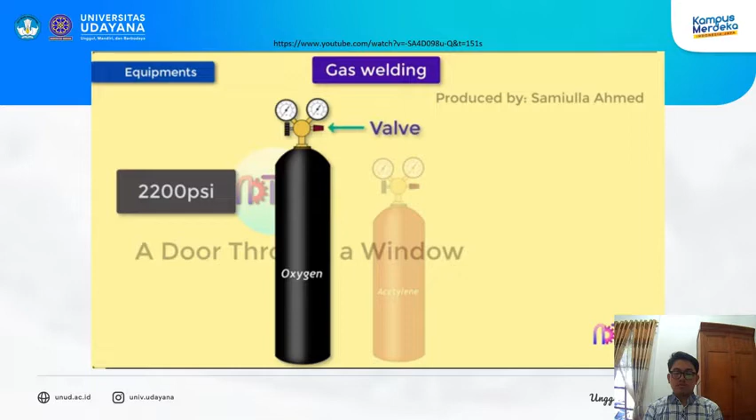Oxygen cylinders contain compressed oxygen at high pressure that can be as high as 2200 psi. All cylinders have valves and are fitted with a screw-on steel cap that protects the cylinder valve when the cylinder is not in use. Acetylene cylinders contain acetylene under pressure, made of steel, and have cylinder valves. The cylinders contain porous filler material, filled with acetone, which allows the acetylene to be safely contained in the cylinder at 250 psi. Acetylene should never be used at a pressure that exceeds 15 psi, as it becomes highly unstable, which depending upon the condition could cause it to decompose and explode.

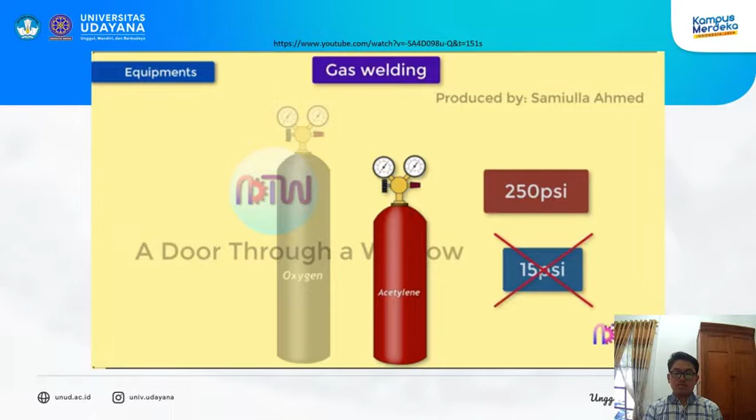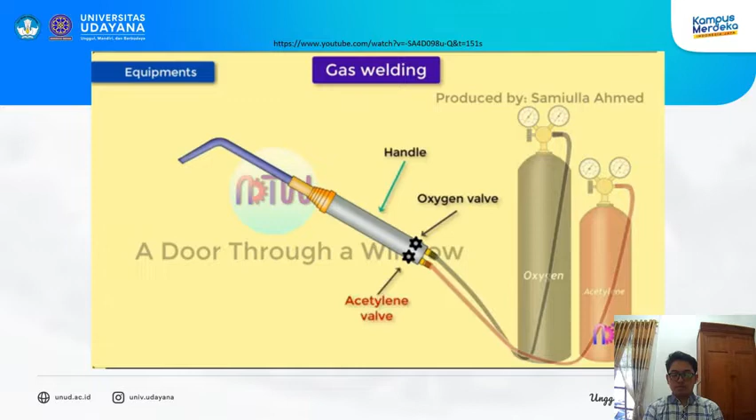Pressure regulators: For welding, the oxygen and acetylene are required at low pressure, but in the cylinders they are filled at high pressure. So a pressure regulator is required to control the pressure of oxygen and acetylene before reaching the mixing chamber. Torch: The torch consists of the handle, oxygen and fuel gas valves, and the mixing chamber. Inside the handle, there are tubes through which the oxygen and fuel gas flow. Mixing chamber: In this chamber, oxygen and fuel gas are mixed according to the ratio required for the type of flame needed, such as neutral, oxidizing, or carburizing flame.

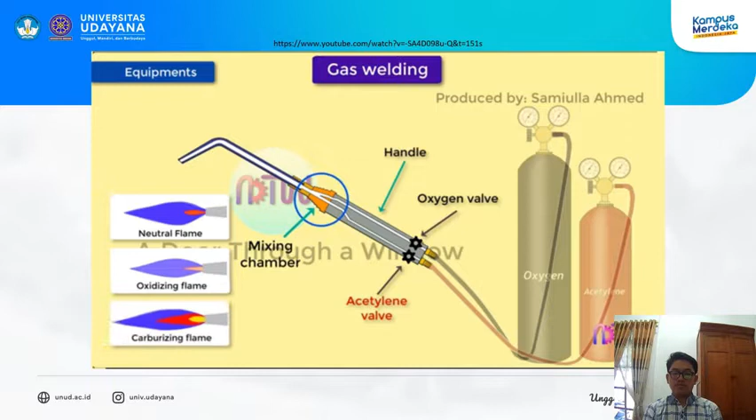Control valves. There are two control valves available in this torch: one for oxygen and the second for fuel gas. These control valves are used to control the flow of oxygen or fuel gas to the mixing chamber.

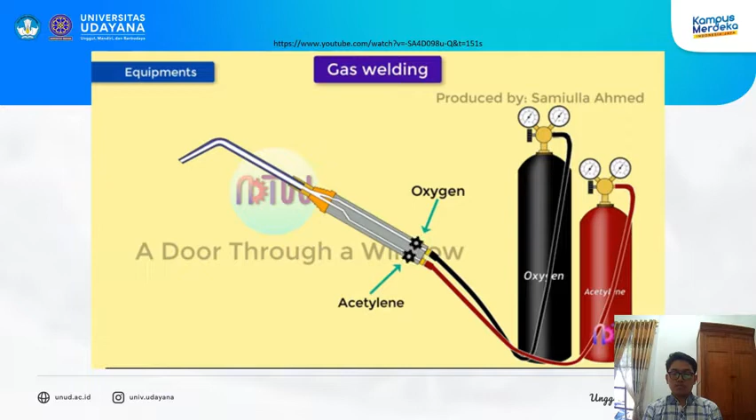Gas hoses are used to transfer oxygen and fuel gas from the cylinder to the welding torch. These hoses are color-coded for easy identification, and this color coding varies from country to country.

Nozzle. The mixture of oxygen and acetylene comes out of this nozzle under pressure and is then ignited by the striker.

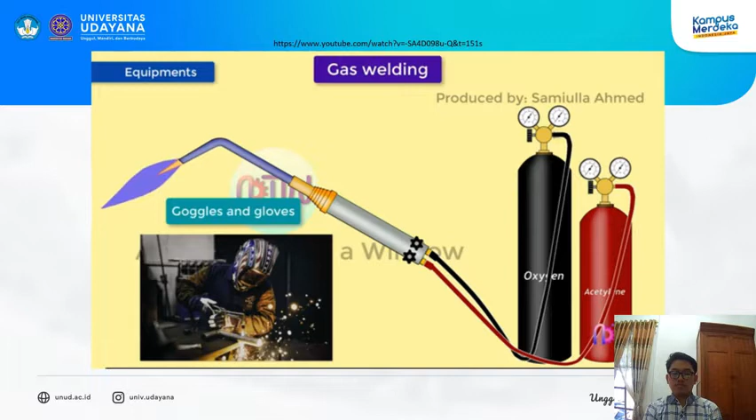Goggles and gloves. In gas welding, goggles and gloves are used for the safety of the operator who does welding. They protect the hands and eyes of the welding operator from radiation and heat of the flame.

Working of gas welding. At first, all the equipment of gas welding is fitted properly and carefully. After that, a regulated pressure of gas and oxygen is supplied to the torch where they are properly mixed. The mixture of fuel gas and oxygen is then ignited by the striker.

Then the flame of the torch is controlled by different valves present in the welding torch. Based on the type of flame required, the valves are operated accordingly.

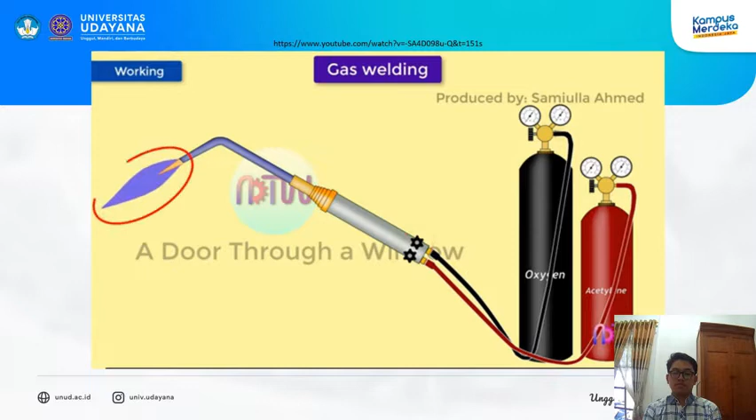If the neutral flame is required, both valves are opened equally. If the oxidizing flame is required, the oxygen valve is opened more. If the carburizing flame is required, the fuel gas valve is opened more. The flame is set as neutral, oxidizing, or carburizing based on the metal, its thickness, and other welding conditions.

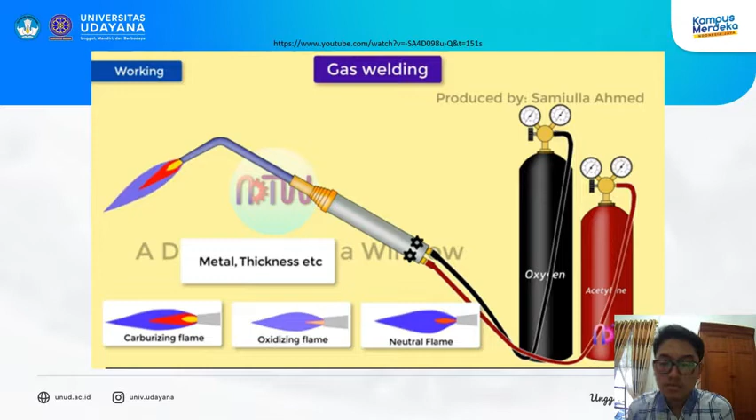If you want to know about types of flames in detail, the link will be provided in the description of this video. After that, the flame of the welding torch is moved along the line between the two metal plates.

Along with the metal plates, a filler rod is also used, which creates a pool of molten material that fills the gap between the two metal plates' interface. The filler rod is moved along with the flame.

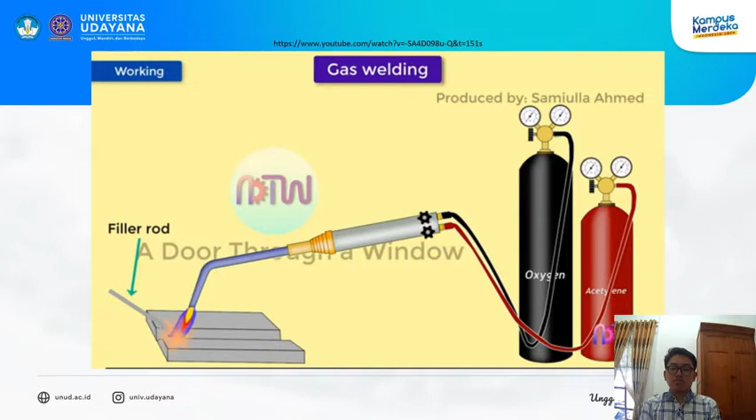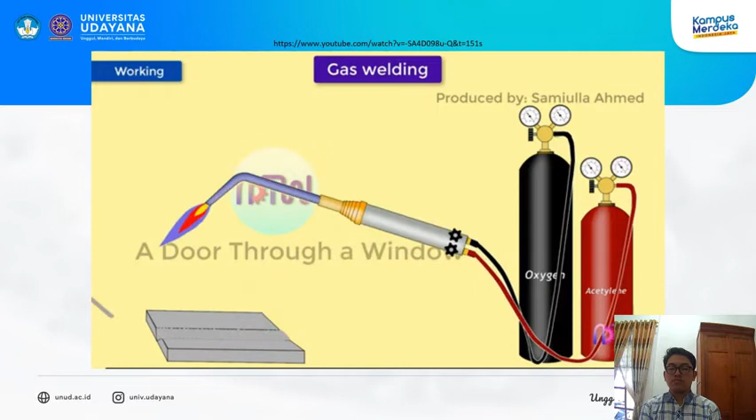The filler rod is kept at an angle of 30 to 40 degrees, according to the welding technique being used. After moving the flame and filler rod along the line of the two metal plates' interface, the two metal plates join together because of the melting and solidification of the metal plates' interface and the filler rod.

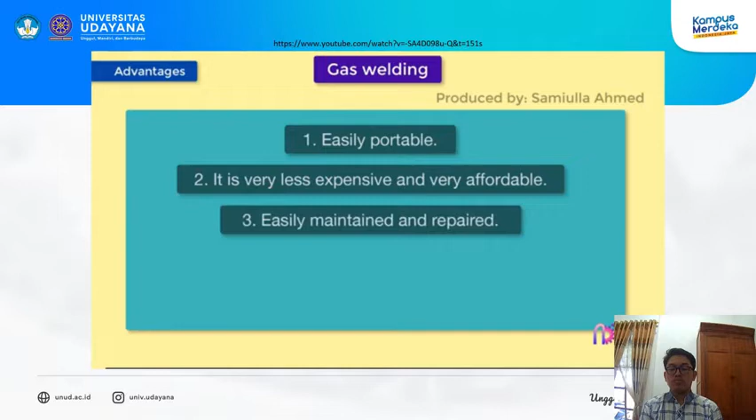Advantages of gas welding: 1. It is easily portable. 2. It is very less expensive and very affordable. 3. It can be easily maintained and repaired. 4. It is a very simple piece of equipment. 5. It is self-sufficient and does not rely on other equipment.

Disadvantages of gas welding: 1. The metal joining rate is very slow, so the welding speed is low. 2. A skilled operator is required to operate this machine. 3. The power density is low. 4. The heat affected zone is large. 5. Gas welding is not recommended for welding reactive and refractory metals like titanium and zirconium.

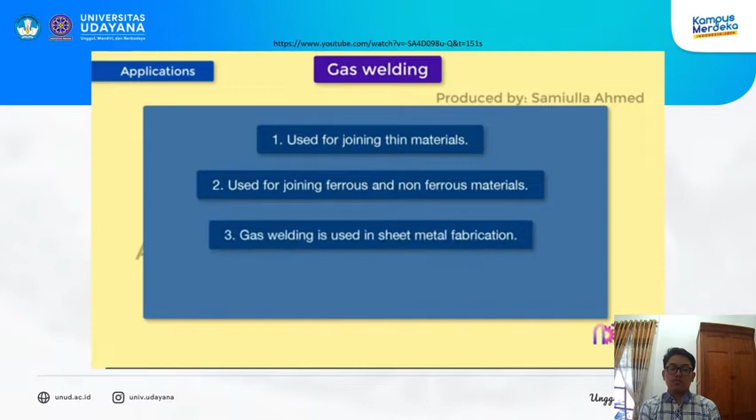Applications of gas welding: 1. Used for joining thin materials. 2. Used for joining ferrous and non-ferrous materials. 3. Gas welding is used in sheet metal fabrication. 4. It is used in aircraft industries.

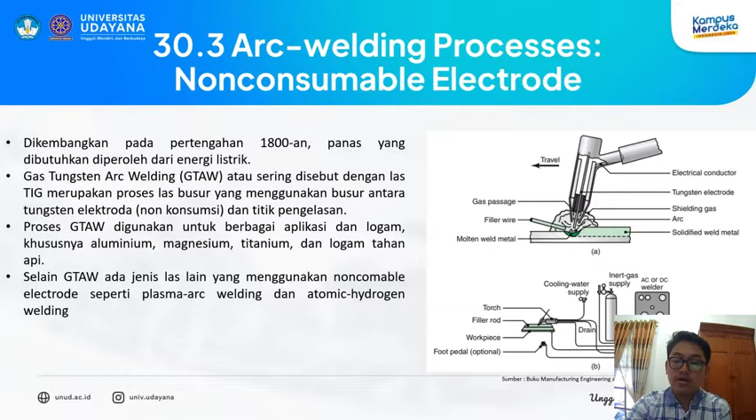Selanjutnya saya akan menampilkan video mengenai GTAW atau gas tungsten arc welding. Mari kita simak bersama-sama video berikut ini.

What is TIG welding? TIG stands for tungsten inert gas welding. The American Welding Society calls this process gas tungsten arc welding, or GTAW. You might also hear it called Heliarc welding.

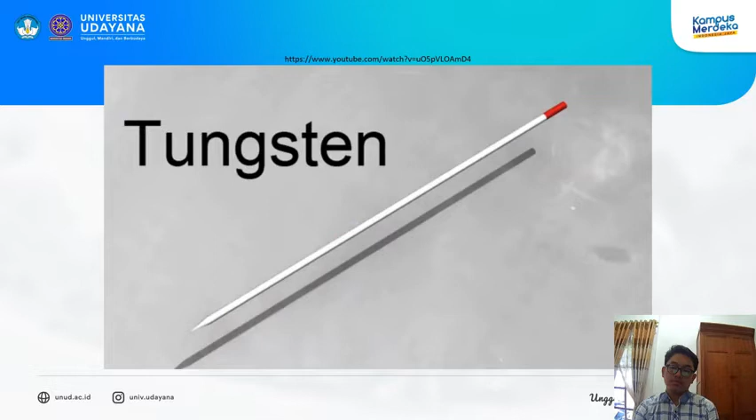TIG welding uses a tungsten electrode. Tungsten has an extremely high melting point. When you TIG weld, the electrode gets hot, but it doesn't melt. We say that it's a non-consumable electrode. That doesn't mean it lasts forever, it just means that it doesn't melt and become part of the weld.

In a lot of other welding processes, the electrode melts and becomes filler metal. Those are consumable electrode processes.

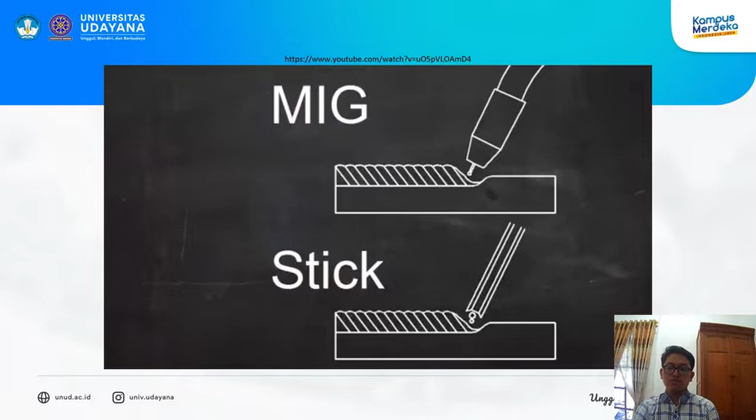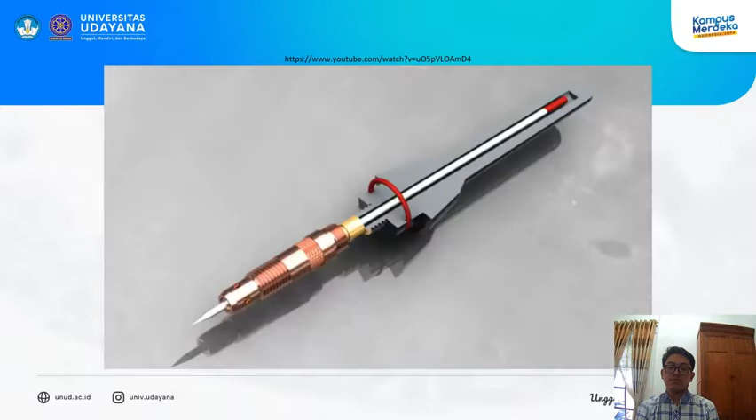Here's the tungsten electrode being held in a TIG torch. The electrode slips into a collet, and the collet tightens up against the collet body. You can adjust the length that the electrode sticks out of the holder by loosening up the end cap. When you tighten the end cap, the collet clamps down on the electrode.

TIG works by melting the base metal, which is the metal that makes up the two pieces to be joined. The heat is generated by an electric arc that forms between the base metal and the tungsten electrode. You can control the amount of heat with a foot pedal or with a thumb wheel on the torch.

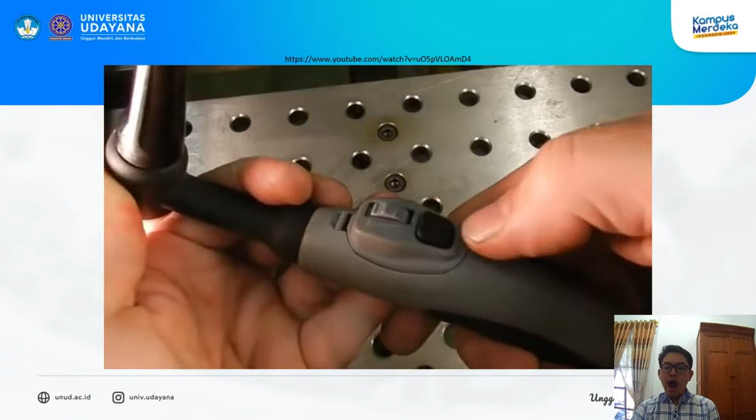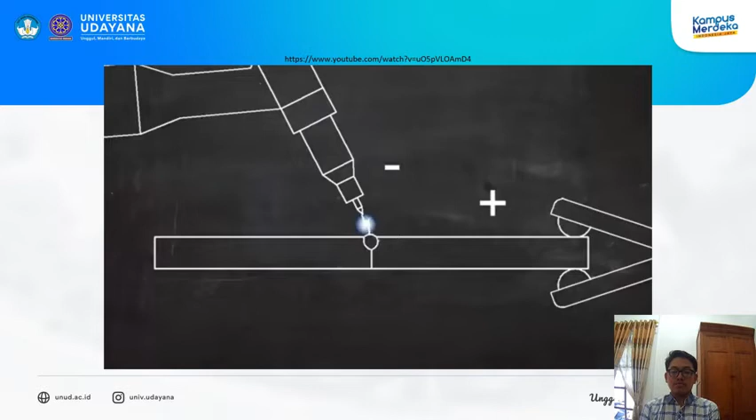For most metals, the current is direct current, or DC. DC is like the current flowing from a car battery - one wire is always negative and one is always positive. In DC TIG welding, the electrode is usually negative and the workpiece is positive. The term DCEN is used for this, indicating that the current is DC and the electrode is negative. This is also called straight polarity, but DCEN is a more descriptive term. DCEN puts most of the heat on the workpiece, and it's the most common setup.

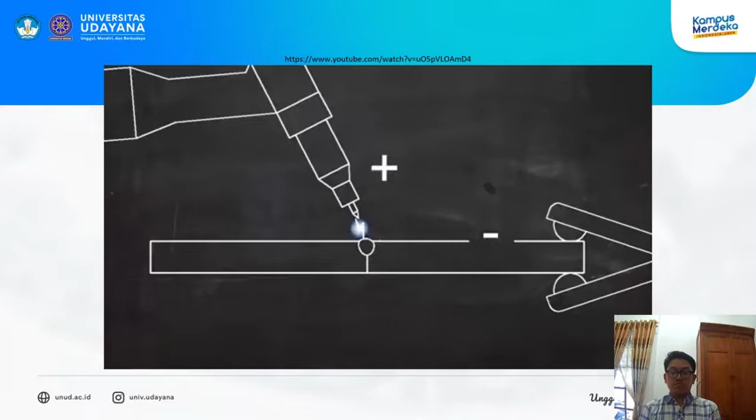When welding aluminum, however, AC is used. In AC, the positive and negative voltages switch back and forth between the electrode and the workpiece. This puts more heat on the electrode, but it has a cleaning effect on the workpiece. Aluminum forms oxides that float to the top of the weld pool and prevent a good weld. AC current helps control these oxides.

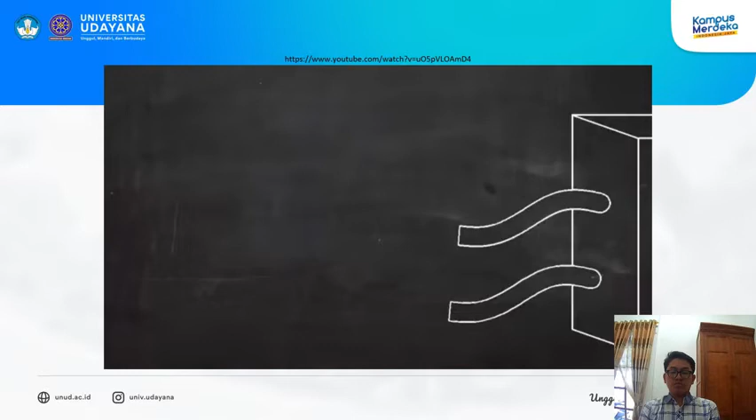In an electric circuit, current flows in a loop. In TIG welding, the current has to flow in a complete circle from the machine to the torch, into the work, and back to the machine. A work lead is clamped to the work to complete the circuit from the workpiece back to the machine.

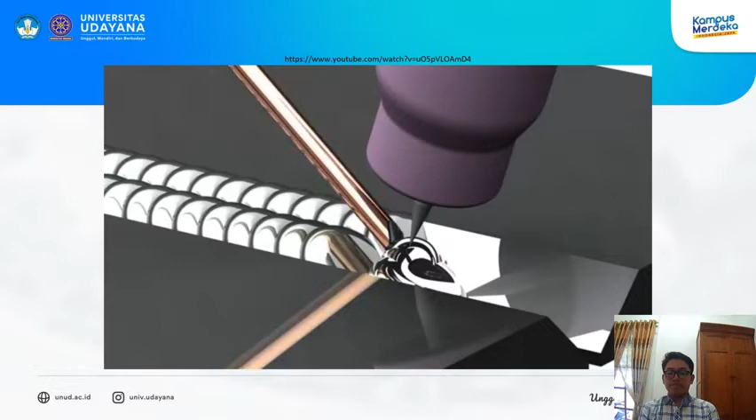You can TIG weld with or without filler metal, and that's not a choice you have in a lot of other processes. If you want to add filler metal to a TIG weld, use a filler rod, which is just a rod of metal with a specific alloy. You want to make sure that the filler metal you're using is compatible with the base metal and that it has the strength required to do the job.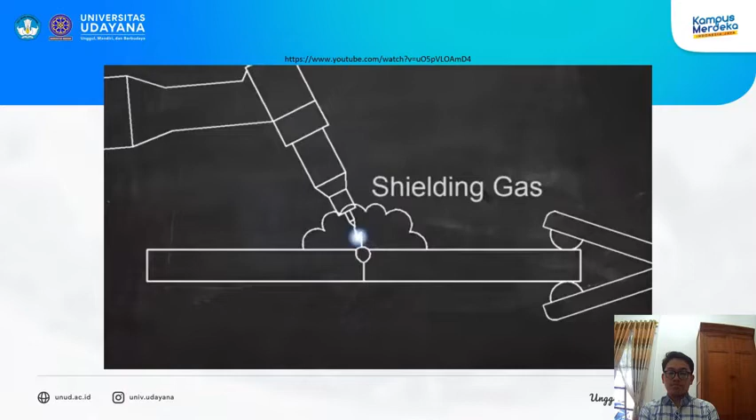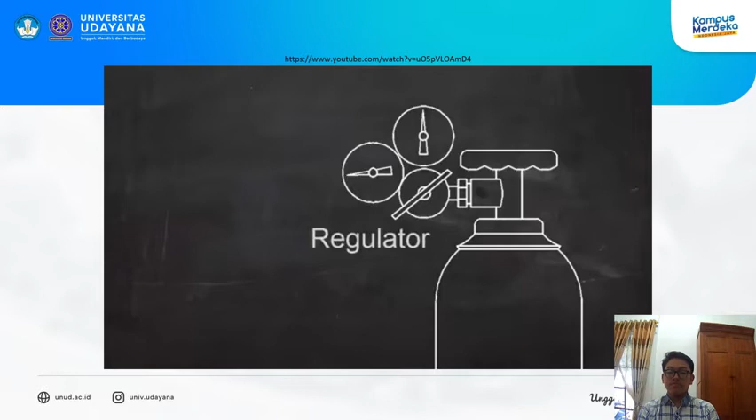In TIG welding, the molten metal is protected by a shielding gas. This gas, usually argon and sometimes helium or other gases, keeps the molten metal from reacting with oxygen and water vapor in the atmosphere. This shielding gas is stored in high-pressure cylinders like these. The pressure is reduced to a usable level by a device called a regulator. The shielding gas flows through a hose and comes out right at the point of the weld.

So in summary, TIG welding is an electric arc welding process that uses a non-consumable tungsten electrode. The filler metal is added separately in the form of filler rod, and the shielding gas comes from a high-pressure cylinder.

Baik, sekian dari video yang saya tampilkan. Mari kita lanjutkan pada materi selanjutnya.

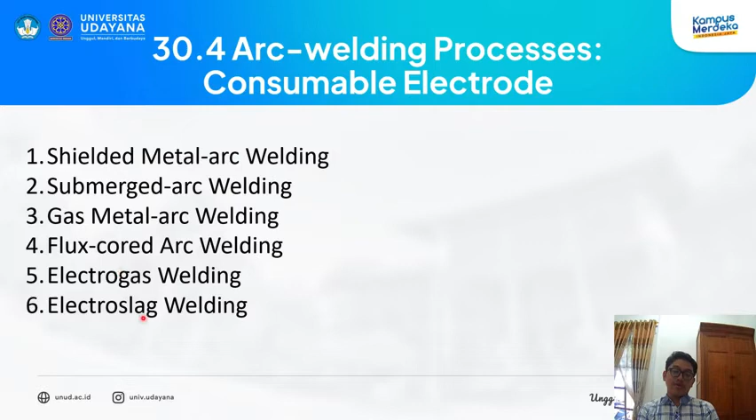Baik. Yang pertama ada shielded metal arc welding atau SMAW. SMAW, atau las busur logam terlindung, adalah suatu proses pengelasan busur listrik di mana energi panas untuk pengelasan dibangkitkan oleh busur listrik yang terbentuk antara elektroda logam yang terbungkus dan benda kerja.

Jadi las SMAW biasa juga disebut dengan istilah las MMA atau manual metal arc atau stick welding. Kata shielded metal arc welding atau SMAW menunjuk pada proses penyambungan dua buah logam atau penambahan logam pada permukaan logam yang ada, di mana proses SMAW ini menggunakan rangkaian listrik untuk menghasilkan busur pengelasan.

Dengan cara merubah daya listrik menjadi daya panas. Panas yang dibangkitkan oleh busur sangat kuat dan sangat terkonsentrasi sehingga segera melelehkan sebagian benda kerja dan ujung elektroda. Dapat dilihat ini adalah benda kerjanya dan ini adalah untuk elektrodanya, yang sangat panas sehingga ketika bersentuhan, elektroda ini akan mencair dan akan menutupi kisi-kisi yang akan dilas.

Yang kedua ada submerged arc welding, di mana submerged arc welding atau pengelasan busur terendam adalah sebuah proses las busur listrik terumpan yang bekerja secara otomatis.

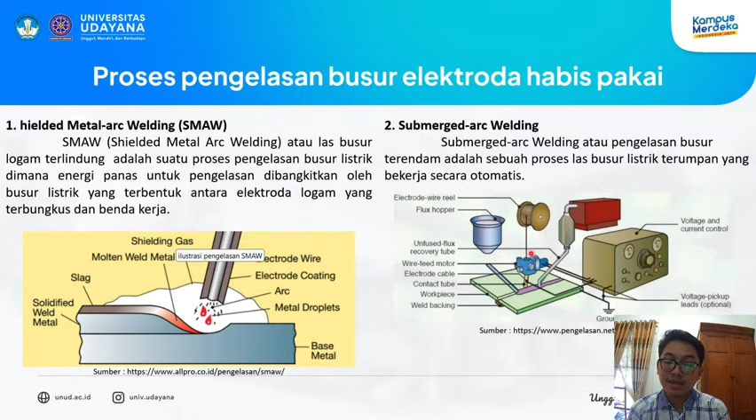Ini perbedaan kawat las ini dengan las biasa. Apabila las biasa itu berbentuk batang, sedangkan yang digunakan pada SAW atau submerged arc welding ini batang namun dia tergulung, karena mesin ini bekerja otomatis sehingga mesin ini dapat berjalan sesuai rel-relnya dan untuk kawat lasnya ini mengikuti dari perjalanan si mesinnya.

Yang ketiga ada gas metal arc welding atau GMAW. GMAW biasa juga disebut dengan MIG atau metal inert gas, merupakan proses pengelasan atau penyambungan bahan logam yang menggunakan sumber panas dari energi listrik yang dirubah atau dikonversi menjadi energi panas.

Pada proses las GMAW ini menggunakan kawat las yang digulung dalam suatu roll dan menggunakan gas sebagai pelindung logam las yang mencair saat proses pengelasan berlangsung. Proses pengelasan GMAW ini terjadi karena adanya perpindahan ion anoda dan katoda pada base metal dan logam pengisi sehingga menyebabkan timbulnya energi panas yang menyebabkan logam induk dan filler metal mencair.

Dapat dilihat ini nozzle-nya. Untuk sistem kerjanya sendiri, si las akan berjalan ke kiri. Ini ada 3 batang atau 3 kabel di dalamnya. Yang pertama ada yang sebelah kanan sendiri ada shielding gas, di mana pipa ini akan menyalurkan gas yang digunakan untuk ini.

Di sini ada solid wire electrode, di mana solid wire electrode ini sebagai material yang akan melelehkan untuk mengisi kisi-kisi dari material yang akan dilas. Dan yang ketiga ada current conductor untuk menghasilkan energi listrik, di mana energi listrik tersebut akan diubah menjadi energi panas.

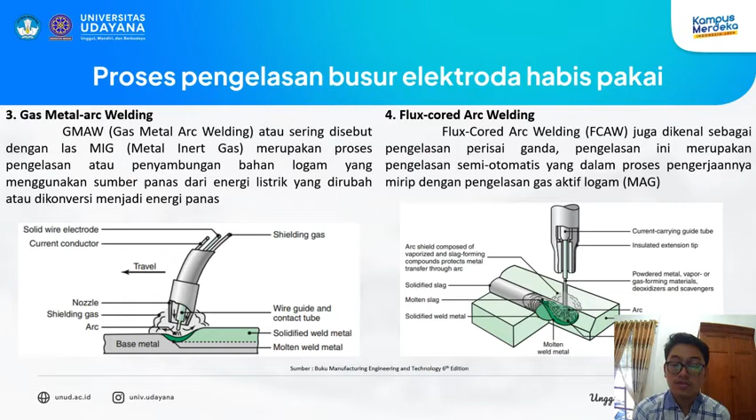Yang kelima ada electrogas welding. Adalah proses pengelasan busur yang menggunakan elektroda consumable continue dan menggunakan molding shoes untuk menahan cairan las. EGW atau electrogas welding secara primer digunakan untuk mengelas sambungan butt atau butt joint dalam satu kali jalan atau single pass.

Secara vertikal, electrogas welding menggunakan kawat elektroda dengan inti flux seperti FCAW, atau bisa juga menggunakan kawat elektroda tanpa flux namun dengan suplai gas pelindung seperti GMAW.

EGW juga menggunakan molding shoes yang mencegah cairan las lari keluar. Molding shoes berperan mirip sebagai rongga cetakan molding. Shoes dilengkapi dengan penggerak mekanis supaya dapat berpindah mengikuti pergerakan las. Di samping itu, molding shoes juga dilengkapi dengan air pendingin untuk mencegah molding tersebut menempel pada las.

EGW atau electrogas welding mampu digunakan untuk mengelas ketebalan dari 12 mm sampai dengan 75 mm. Yang terakhir ada electroslag welding, proses pengelasan satu lintasan yang sangat produktif untuk bahan tebal dalam posisi vertikal atau dekat dengan vertikal.

Electroslag welding atau ESW secara prinsip dan aplikasi mirip dengan EGW atau electrogas welding, di mana pengelasan dilakukan secara vertikal di atas dengan satu kali jalan atau single pass. Sama halnya dengan EGW, ESW digunakan untuk mengelas sambungan butt secara otomatis dengan bantuan mesin.

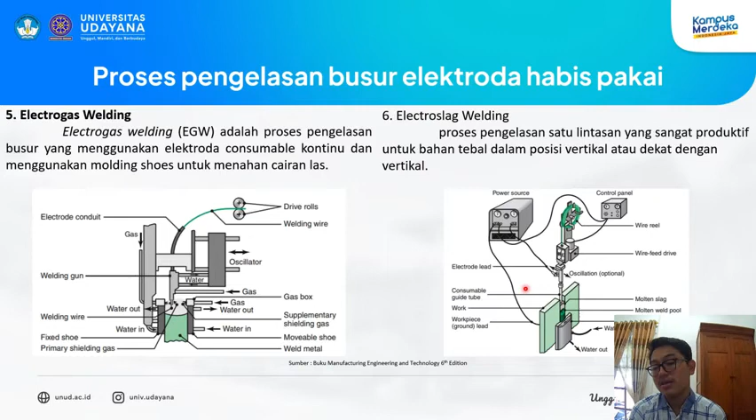Berikut saya akan menjelaskan mengenai proses pengelasan dengan teknik flux core arc welding. Mari kita simak bersama-sama video yang akan saya tampilkan.

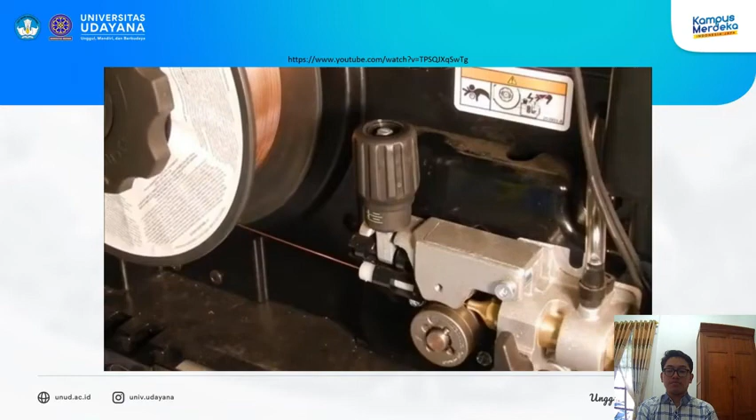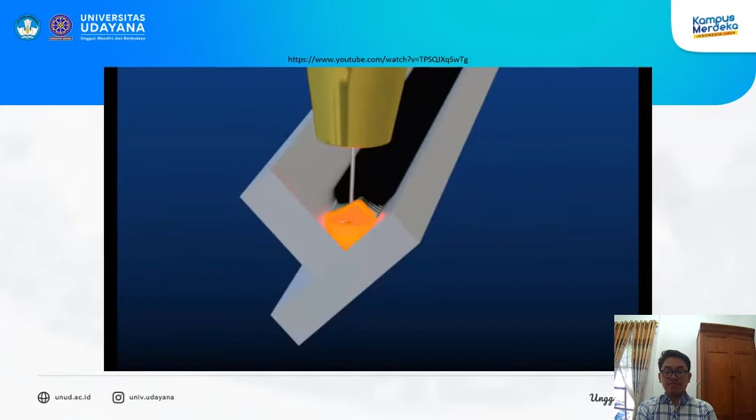Usually, this wire feeder requires knurled rollers that can grip the tubular wire without flattening or damaging it. As in MIG welding, an electric arc forms between this wire electrode and the workpiece. This arc heats both metals above their melting point, and they mix together or coalesce and solidify to join the workpieces into a single piece.

The metal in the parts to be joined is called the base metal, and the metal that comes from the melting wire electrode is called filler metal. Because the wire electrode melts as it's being used, flux core is called a consumable electrode process. Flux core welding always adds filler metal to the joint.

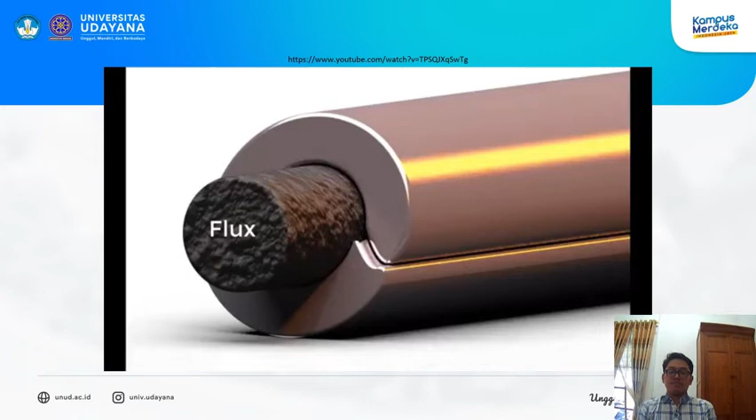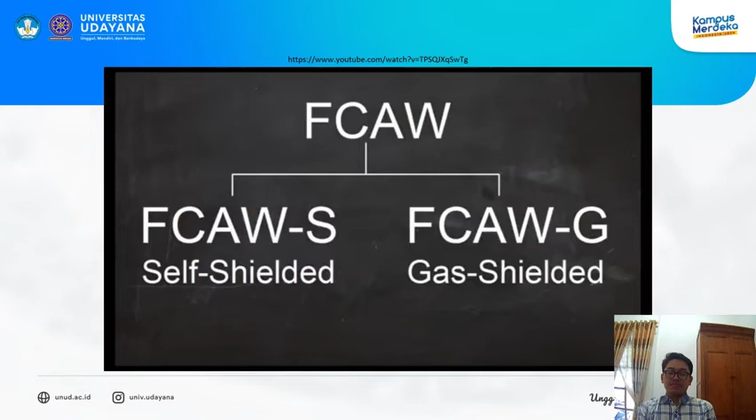The job of the flux inside the electrode depends on which type of flux core process it was designed for. There are two main types of flux core arc welding: self-shielded, known as FCAW-S, and gas-shielded, known as FCAW-G. You need to be sure you're using the wire in the way it was designed to be used, because the chemistry behind these two processes is different.

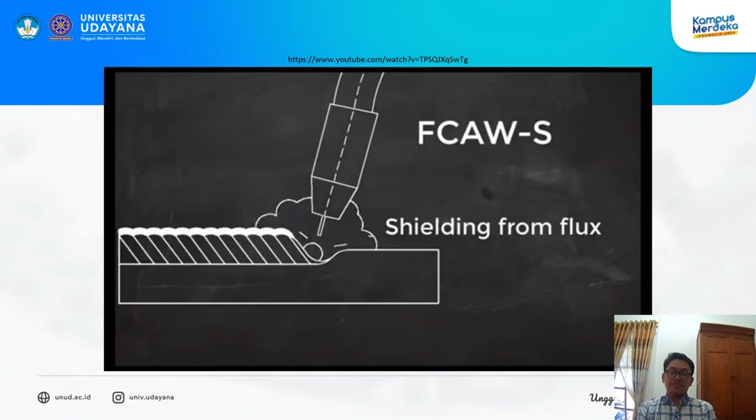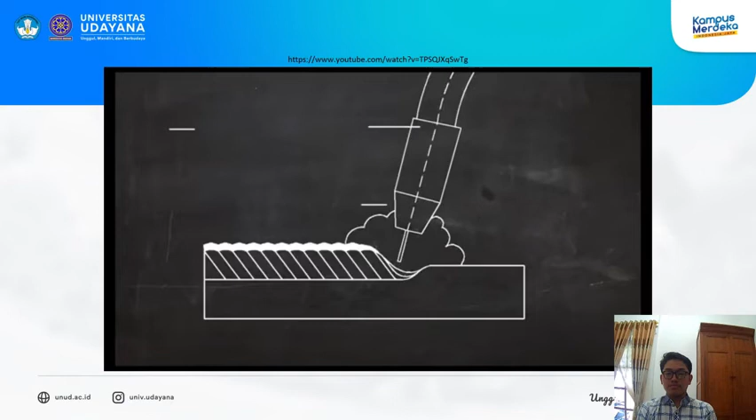Flux core electrodes designed to be self-shielded contain a flux that completely protects the molten weld pool. The flux in these electrodes creates a protective cloud that prevents gases like nitrogen and oxygen from reacting with the hot metal. One advantage of the self-shielded flux core process is that the added cost and inconvenience of gas shielding equipment is eliminated. Also, self-shielded electrodes are less sensitive to drafts and breezes that easily contaminate gas-shielded processes like MIG welding. This can be a real advantage in some applications.

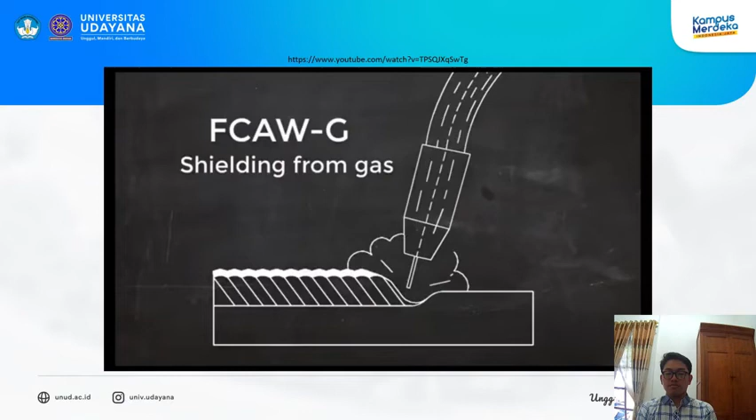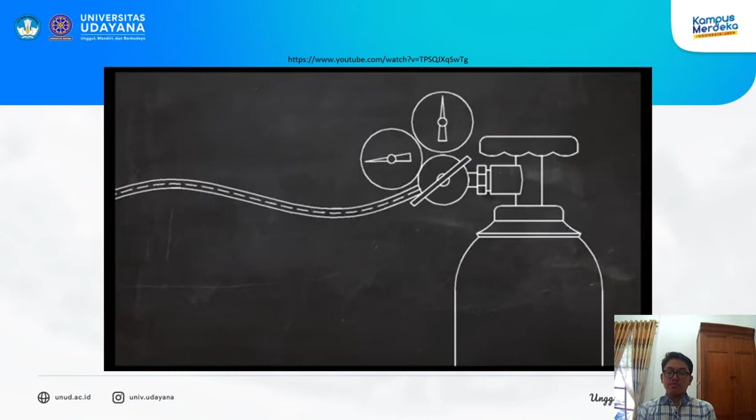Electrodes designed to be gas-shielded rely on a secondary shielding gas to protect the molten weld. The high-pressure gas cylinders used for this process are of the same design as those used in MIG or TIG welding. These cylinders contain gas under extremely high pressure, and a device called a regulator brings the gas to a usable pressure. One of the most common gases used to shield flux core is pure CO2.

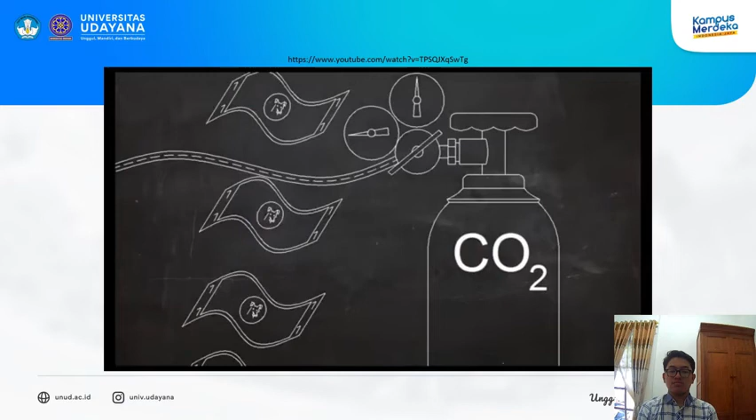Other gases, such as CO2-argon blends, are also used. But one advantage of flux core G is that low-cost CO2 can be used to shield the weld. Another benefit of gas-shielded flux core is the high deposition rate that can be achieved with the combination of flux and gas. Gas-shielded flux core has the ability to lay down metal at an extremely fast rate.

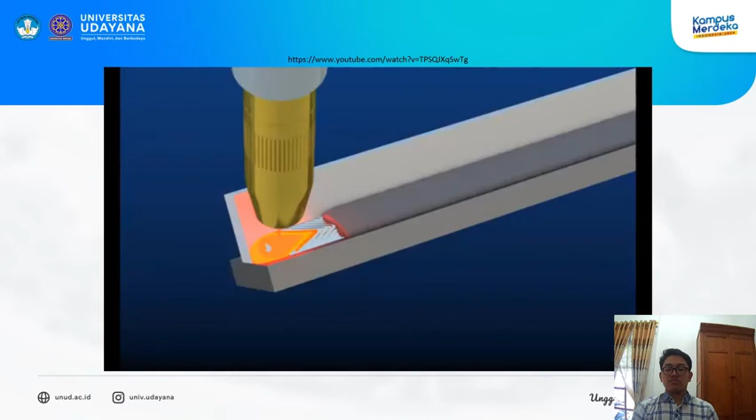In both the self-shielded and gas-shielded processes, the flux forms a thin layer of slag that protects the weld as it cools. This slag also helps the solidifying weld take a consistent, low-profile shape.

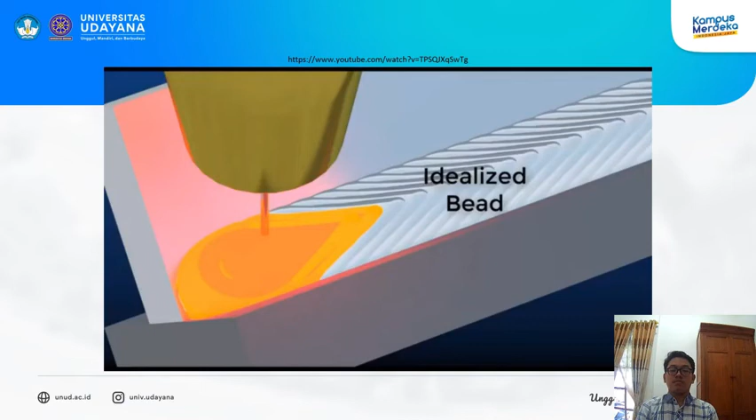In flux core welding, all of the machine controls are set on the machine itself. The most important of these are polarity, wire speed, and voltage. The trigger on the gun is just an on-off switch.

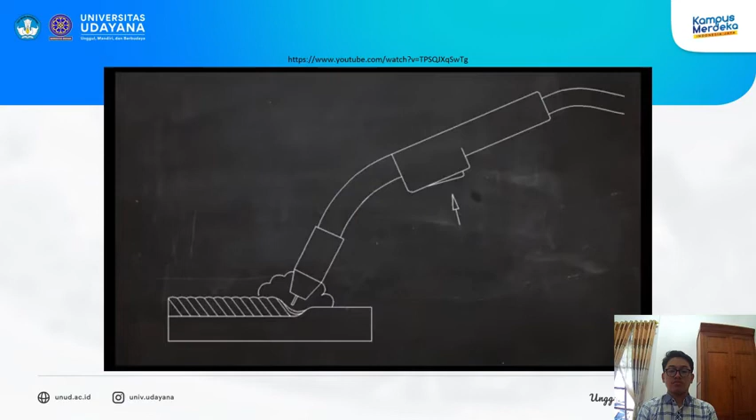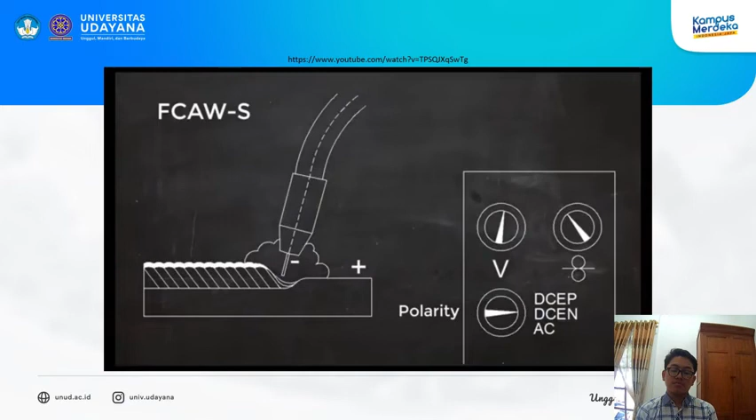For most flux core welding, the current is direct current, or DC. DC is like the current flowing from a car battery; one wire is always negative and one is always positive. In self-shielded flux core welding, the electrode is usually negative and the workpiece is positive. The term DCEN is used for this, indicating that the current is DC and the electrode is negative. You might also hear this called straight polarity.

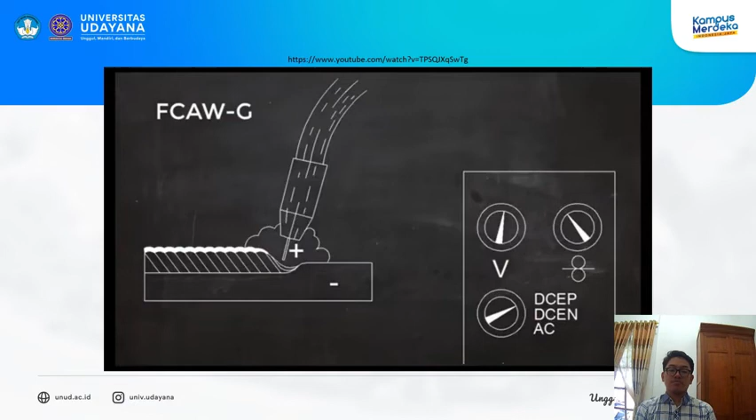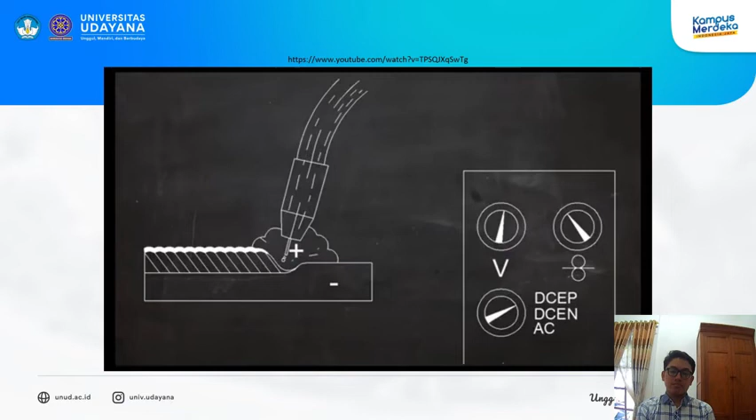In gas-shielded flux core welding, the electrode is usually positive and the workpiece negative. The term for this is DCEP, indicating that the current is DC and the electrode is positive. This is also called reverse polarity, but DCEP is a more descriptive term. Keep in mind that these are the most common settings. Always check your manufacturer's recommendations.

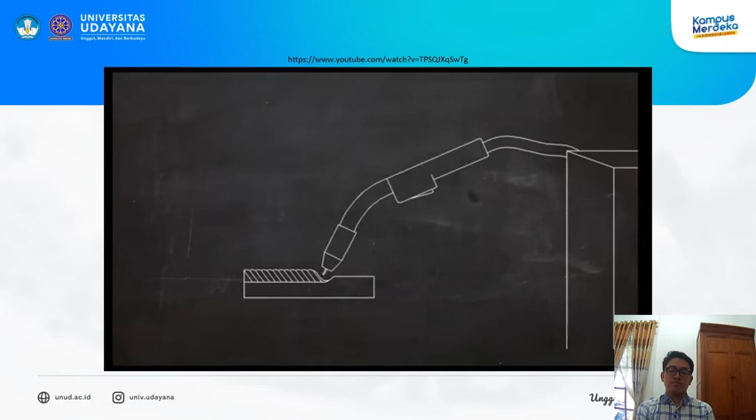In an electric circuit, the current flows in a loop. In flux core welding, the current has to flow in a complete circle from the machine to the gun, into the work, and back to the machine. A work lead is clamped to the work to complete the circuit from the workpiece back to the machine.